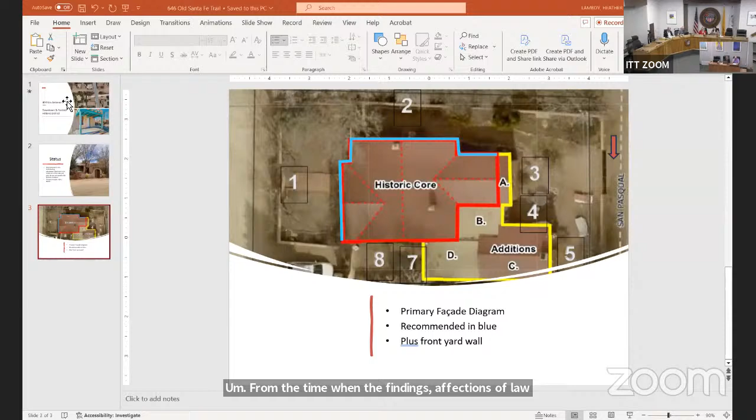Okay, we'll move on to the first case. Heather, this is your case. Are your applicants in the room? Yes, they are. IT, if you can go ahead and put the PowerPoint up, I appreciate that. I'm sorry if this PowerPoint is very basic, but I ran into some time constraints.

The application is for a status review for the structure, a single-family residence located at 403 San Antonio Street, which is located in the downtown and east side historic district. It's on the southeast corner of San Antonio Street and Acequia Madre, directly across from Acequia Madre School.

The consultant who produced the recommended status recommended non-contributing. There's a lot of information as to why that non-contributing status was a recommendation. Staff reviewed the application. It is possible that a contributing status is warranted in this case because the additions are to the rear and to the side of the historic building. The historic building's vocabulary is present and discernible.

So staff is making the recommendation of a contributing status with primary facades number 1 and 2, highlighted in blue here, which is the extent of the historic building, the north and west elevations of the historic building, plus the front yard wall, which is a distinguishing characteristic that was there historically as well.

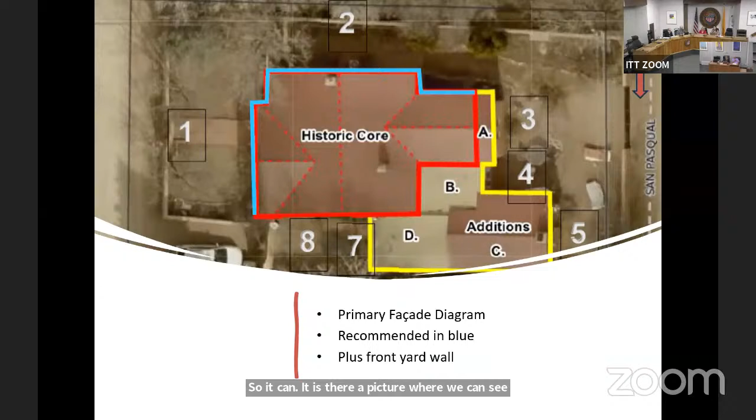And the wall, so is there a picture where we can see exactly what portion of the front wall you're referring to as being proposed to be contributing? One moment, let me get a picture of that for you really quick. I'm sorry for the delay. Okay.

Okay, and so you're recommending that the front wall that's aligned with the street is not being recommended as contributing? That is correct. Do we know anything about the history of that wall? That was not addressed in the HDRB.

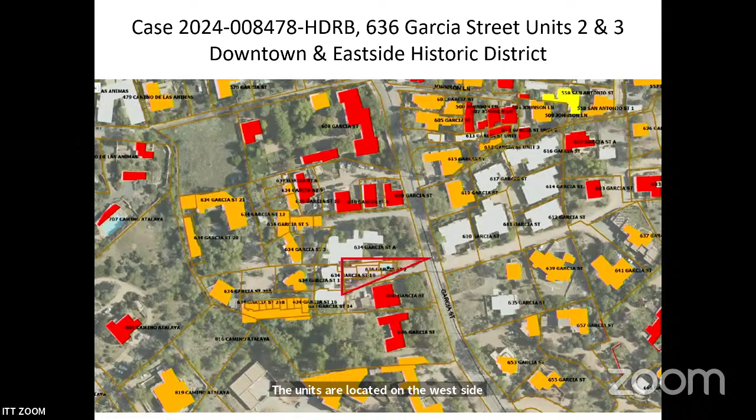Can you hear me? This is case 2024-8478 HDRB for 636 Garcia Street, units 2 and 3, for status review. 636 Garcia Street consists of 3 units, now condos with separate owners for each unit. The units are located on the west side of the road, south of Camino de las Animas and Johnson Lane. The multifamily residence at 636 Garcia Street is a 3-unit compound with no historic status assigned to it. The property is located in the downtown and east side historic district. The structure was constructed in the early 1950s by adding 2 dwellings, an apartment and a 1-bedroom rental, to an existing 1940s garage.

What was formerly the garage became Unit 3. In the 1950s, the 3 units were associated with the main residence to the south, which was split from the lot in 2021 and addressed as 640 Garcia Street.

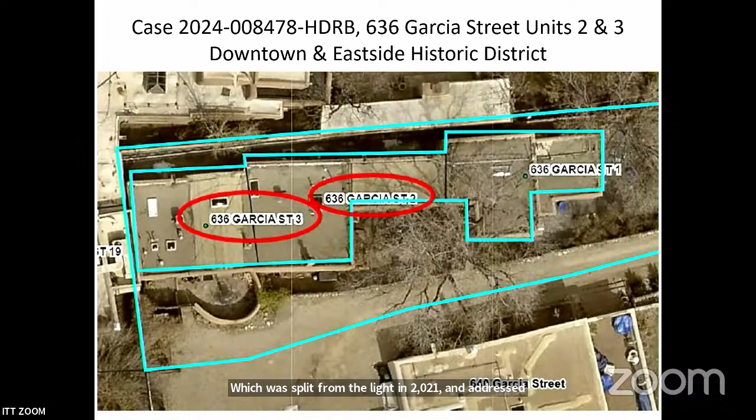Units 2 and 3 at 636 Garcia Street are constructed of adobe in a vernacular style with stucco walls, concrete foundation, and a single level. The roof consists of a combination of flat, gabled, and shed roofs. Windows throughout the structure are wood, with a combination of single hung, casement, combination picture, sliding, and fixed windows. Doors consist of single leaf wood and double doors with full light plank, half light, and divided glass.

Unit 2 is 1,032 square feet and shares a common wall with Unit 3 on the west and a common wall with Unit 1 on the east. The south elevation is the front of the structure and looks into small courtyards, consisting of an entry door and windows in the bedroom, kitchen, and living room. Some of the windows have been replaced at an unknown date, and it is unclear if the openings are original to the structure.

The north elevation includes newer windows, several non-historic openings, including a long combination picture window on the more eastern portion of the unit in the living room, single light casements in the bathroom, and a divided light casement at the bedroom further to the west.

Unit 3 is 754 square feet, shares a common wall with Unit 2 on the east and the neighboring property to the west. The south elevation looks into a small brick courtyard. The east end is most likely part of the original small house and has a full light door in the living room, flanked by modern casement windows. To the west was likely the earlier garage and includes a half-light door and windows arranged in a stepped manner. The north has gabled and flat roof sections. The gabled area on the east has a pair of modern glass doors opening to the living room, while the flat roof portion on the west has a pair of wood sliding windows in the bedroom.

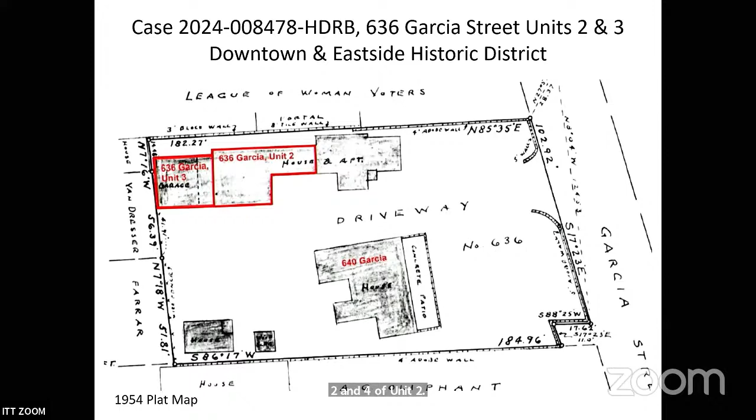Though the property is no longer associated with the primary structure at 640 Garcia Street, 636 Garcia Street Units 2 and 3 have historic integrity of their own. They are constructed of adobe and are representative of how historic buildings were expanded over time. Staff believes the south elevation, facade 2 of Unit 3, is the primary facade due to the historic width of the door and the layout of the fenestrations and the various roof lines. The south side, facades 2 and 4 of Unit 2, are the primary facades due to the inset of the fenestrations and the various roof line of the structure.

Staff recommends the historic status of the structure be designated as contributing, and the south facade, facade 2 of Unit 3, and the south facades, facades 2 and 4 of Unit 2, be designated as the primary facades for SFCC section 14-5.2C designation of significant and contributing structures.

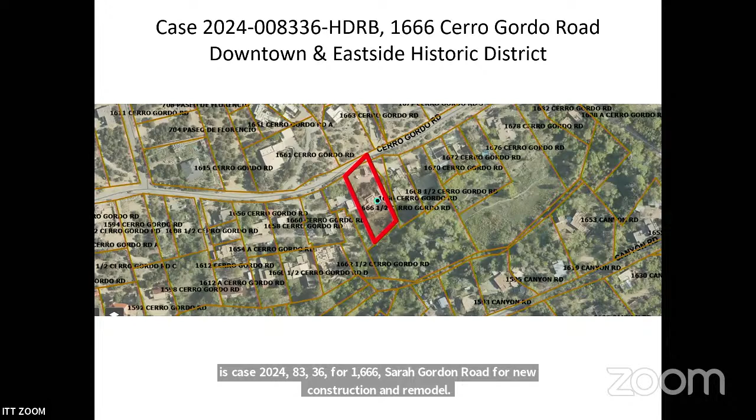This is case 2024-8336 for 1666 Cerro Gordo Road for new construction and remodel. 1666 Cerro Gordo is located on the south side of Cerro Gordo, just east of Paseo de Florencio.

The property at 1666 Cerro Gordo is located at the top of Cerro Gordo Road at the head of a private driveway. It and all the other homes on the dirt lane sit below grade on a terraced bench dating from the area's agricultural use. The Acequia Cerro Gordo, which allowed this agriculture, courses along the backside of this house.

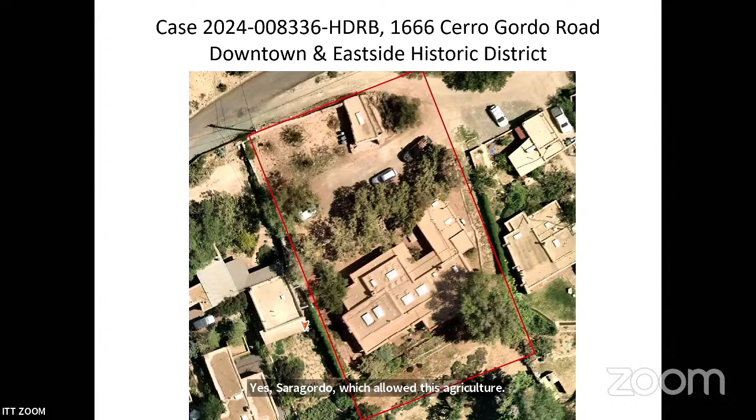A tall stone retaining wall holds back the earth underneath Cerro Gordo, and abutting against the wall is a small stone building, which was once a garage. South of this is a screen of junipers, with the land stepping down to another terrace where the house is located. The 420 square foot stone garage unit is listed as significant to the historic district. The stone garage was constructed prior to 1948 with inset vigas, a large buttress on the southeast, and a smaller buttress on the southwest. The door in the garage was replaced after the 1983 survey.

The single-family residence with garage at 1666 is 3,345 square feet. It's listed as non-contributing to the downtown and east side historic district.

The main residence has had numerous additions and reached its current compound footprint by the late 1960s. After 1978, portals were added across the north facade and a sunroom was constructed on the east elevation. The house went through a major renovation in 2000, during which the windows were refurbished and replaced. The carport was reconstructed and new doors were added.

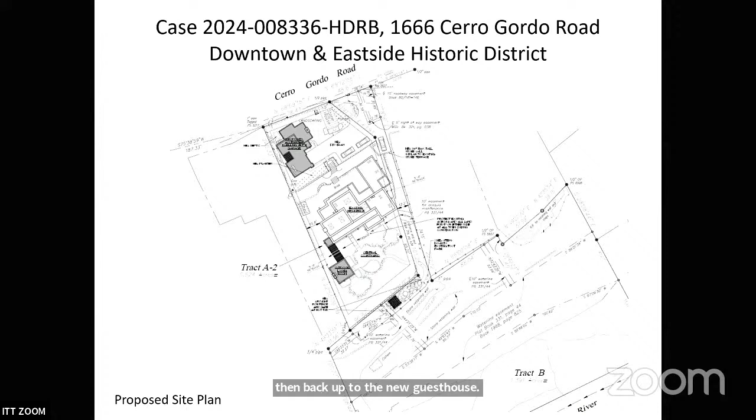On the significant stone building, the applicant proposes to replace as needed the glazing, flashing, and weatherproof the existing skylight, while retaining the skylight opening and height. Install a mini split condenser to the west of the structure along the retaining wall, with line sets penetrating the existing small opening in the building wall. The condenser unit and lines will not be publicly visible.

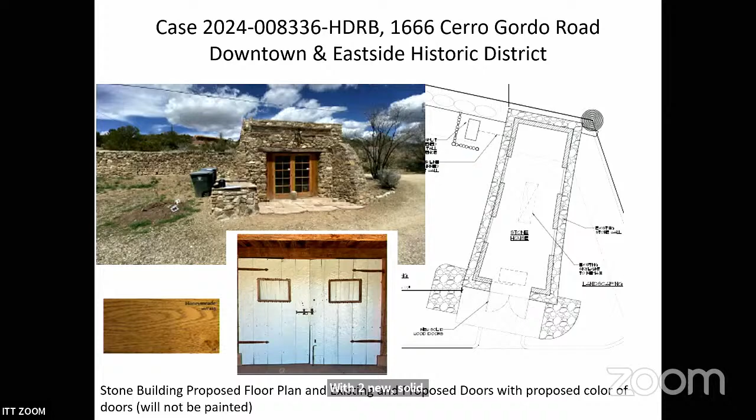They will also replace the French doors on the south elevation of the stone building with two new solid wood zaguan style doors. The doors will be stained in a honey mead color. And those are the only proposed changes to that stone building.

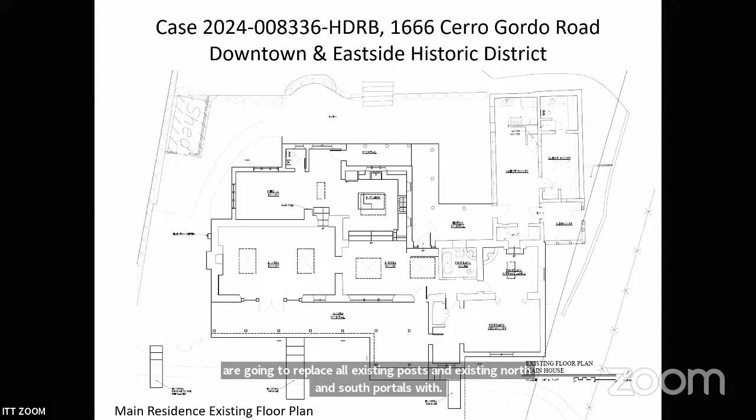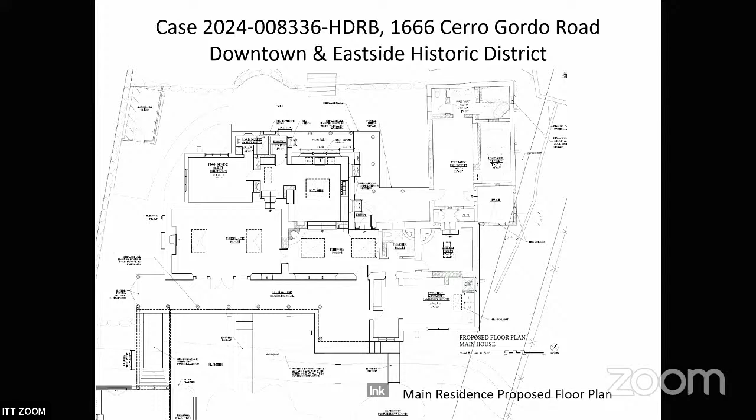On the main residence, they are going to replace all existing posts and existing north and south portals with new 10-inch diameter posts, paint all posts and beams in a coastal plain, paint the door and window trims and shutters throughout, and restucco the existing house with cementitious in adobe color.

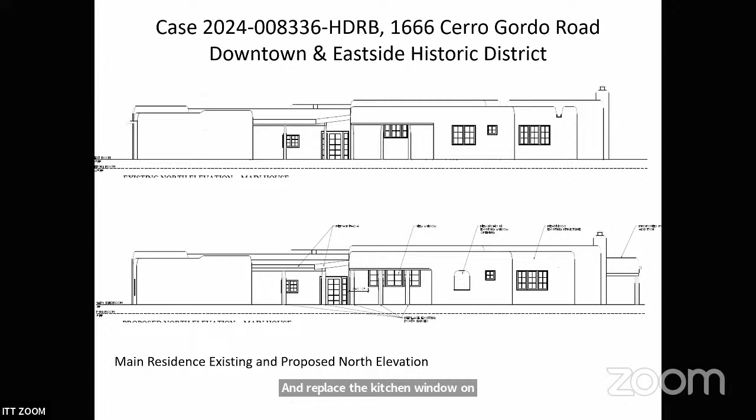On the north elevation, they're going to remove the existing window on the north in what will be the new pantry location and infill it to create an exterior nicho, and replace the kitchen window on the north elevation with a 10 by 3.5 inch divided light window.

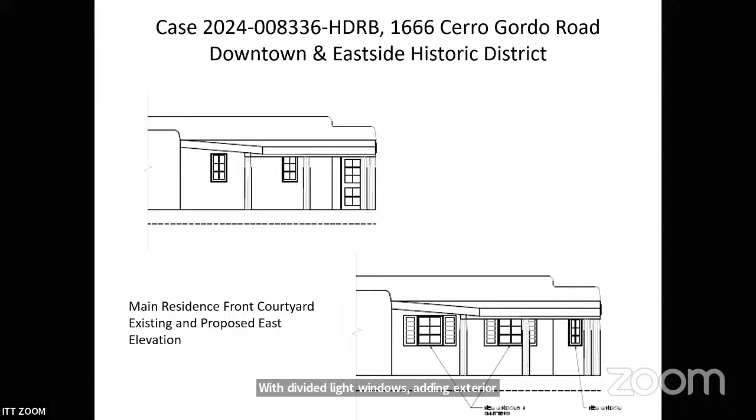On the east elevation, they're going to remove the exterior door at the kitchen under the portal and replace it with a divided light window. Replace both windows adjacent to the stove looking out into the courtyard with divided light windows, adding exterior shutters to these two new windows. The size of those windows is changing.

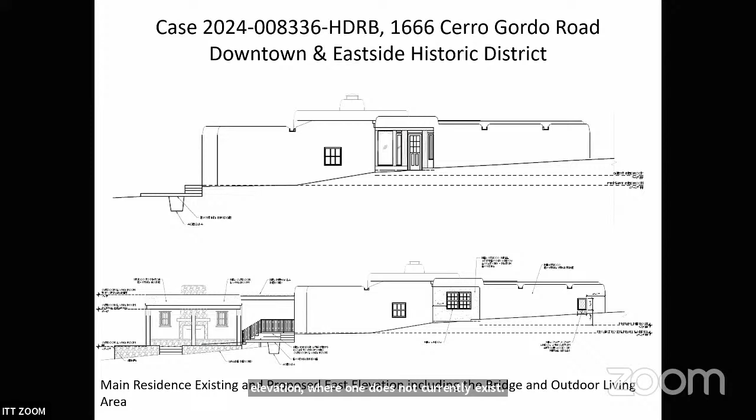Install a window in the new primary bath on the east elevation where one does not currently exist, and replace the windows and door in the sunroom and infill the remaining area.

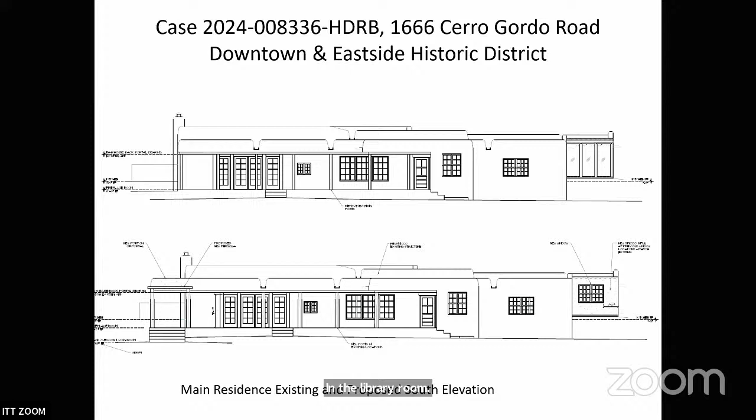On the south elevation, they're going to extend the south portal by 100 square feet and install 2 new posts, install a skylight in the library room, and replace the windows in the sunroom on the south elevation and infill the remaining space.

This is the west elevation of the main residence and includes the proposed bridge and open living area, which are coming up next.

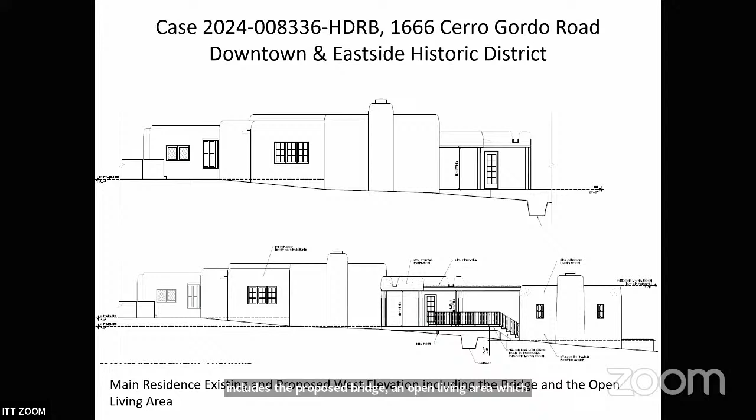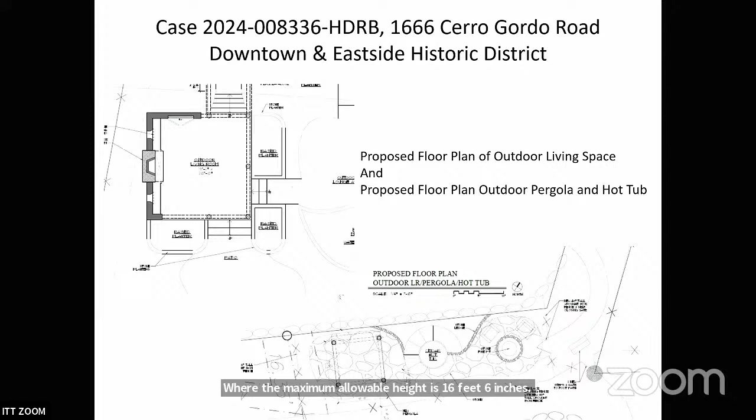This is our accessory structure. They're going to construct a 383 square foot outdoor living room with a stone fireplace and chimney to a height of 11 feet 7 inches, where the maximum allowable height is 16 feet 6 inches. There will be stuccoing in cementitious adobe, and all posts and beams will be painted in coastal plain.

They're going to construct a bridge over the acequia. The bridge will have a wrought iron railing and a wood pergola above it. The pergola will be stained in honey mead. The posts will be 10-inch in diameter. The bearing beams will be 8-inch by 10-inch. The roofing will consist of latillas that vary in size with a 4.5-inch maximum diameter.

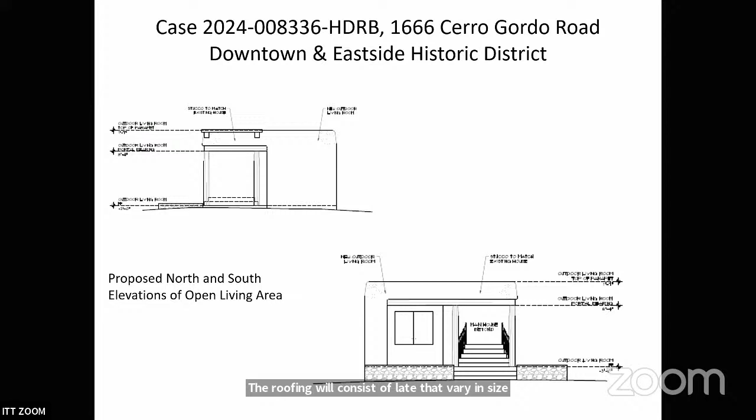Site changes will include constructing 48-inch tall coyote fence screening southeast of the driveway, installing 2 condenser units with 48-inch tall coyote fence screens, constructing 36-inch tall stone wall at the new guest parking space on the east side of the property.

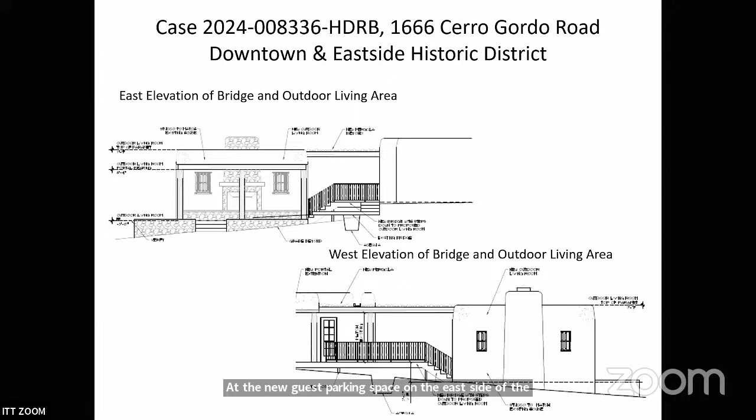This is going to be similar to the existing stone terrace across from the main house. They're going to construct a 95 square foot wood pergola located on the south of the property. The pergola will be stained in honey mead. The posts will be 10 inches in diameter to match the rest of the house. The bearing beams will be 8-inch by 8-inch, and the roofing will consist of latillas that vary in size with a maximum 4.5-inch maximum diameter.

Install a hot tub, replace the fence at the hot tub location with a 48-inch tall wrought iron fence with a self-closing gate.

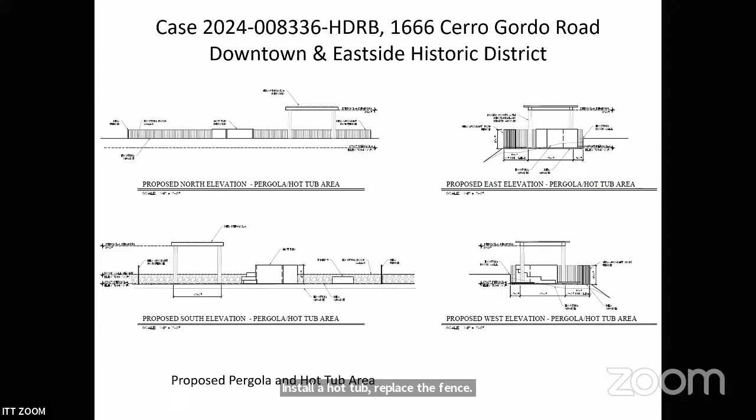And then we go to the guest house. The guest house will have a garage. The applicant proposes to construct a 1,500 square foot guest house with garage to a height of 12 feet, where the maximum allowable height is 16 feet 6 inches on the north of the property. This will be right next to the stone building.

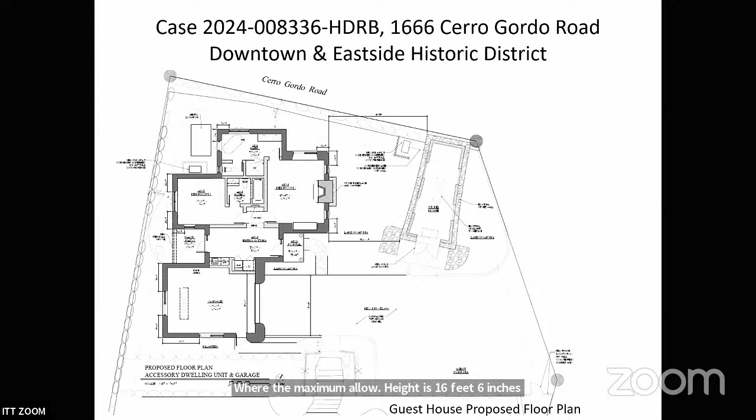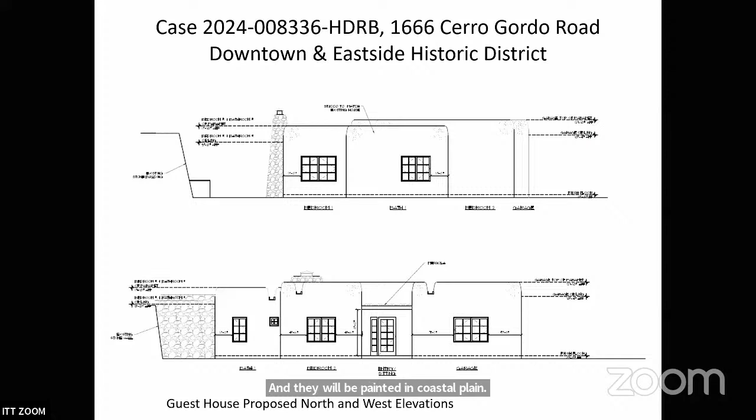Posts and beams in the portals on the east elevation will be stained in honey mead with decorative painted traditional motifs; the design is still to be determined, and they will be painted in coastal plain. A stone fireplace and chimney will be located on the east elevation. The pergola on the west elevation will be constructed with 8x8 wood beams. The door and window trims will be painted in coastal plain, and the stucco will be cementitious adobe.

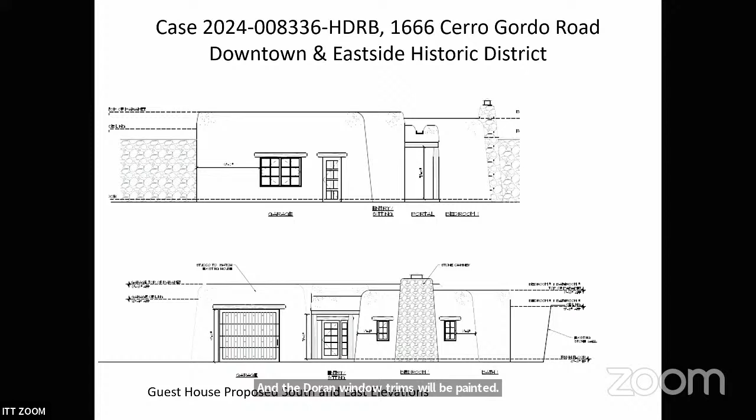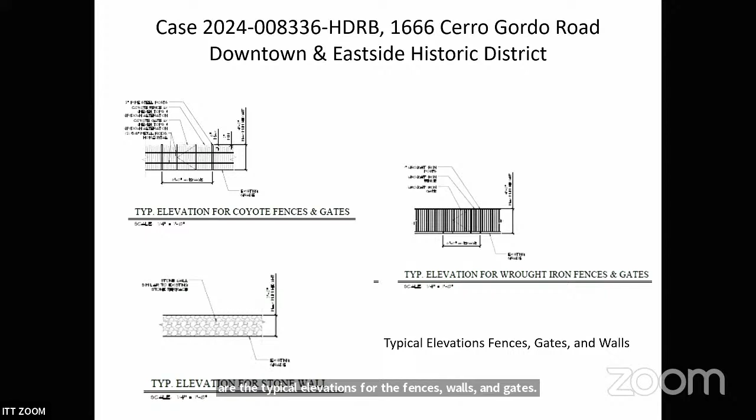Staff recommends approval of the proposed project and finds that the application complies with sections 14-5.2D, general design standards for all historic districts, and 14-5.2E, downtown and Eastside design standards.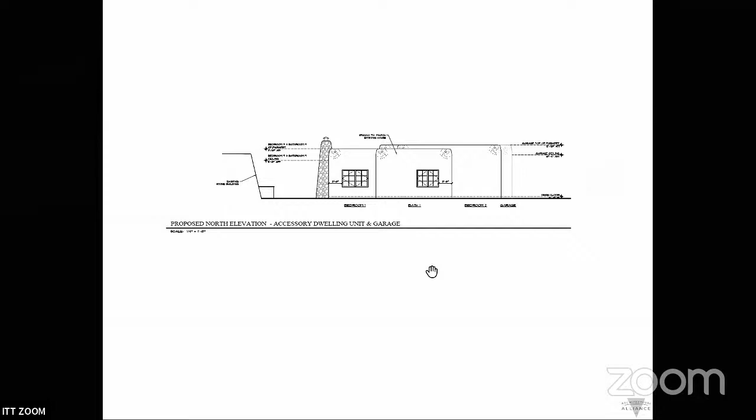So Lanny gave us a pretty thorough presentation on the project, which has a lot of moving parts. What else do you have to tell us? Thank you, Chair Guida. Good evening, board members, and thank you, Lanny. My presentation is going to be quite short. I'll go through it as quickly as possible so we can have time for other people and for comments.

The owners of this property need additional guest rooms for their grown children to come and visit them. Looking at the existing main house, you can see it's bound on the south side by the acequia and on the north side by the retaining walls. So there's no room to add on to the existing main residence. That is why they're proposing the casita with an attached one-car garage on the northwest side of the property.

They also would like to have a little more outdoor entertaining space. The existing portal is quite lovely, but it's not quite big enough for a dining room table for a family. So they want to do an outdoor room, and we are proposing that outdoor room be in this lovely courtyard just to the south of the main building. We would like to connect that via a bridge and a pergola so it feels like a continuous structure and they really engage each other.

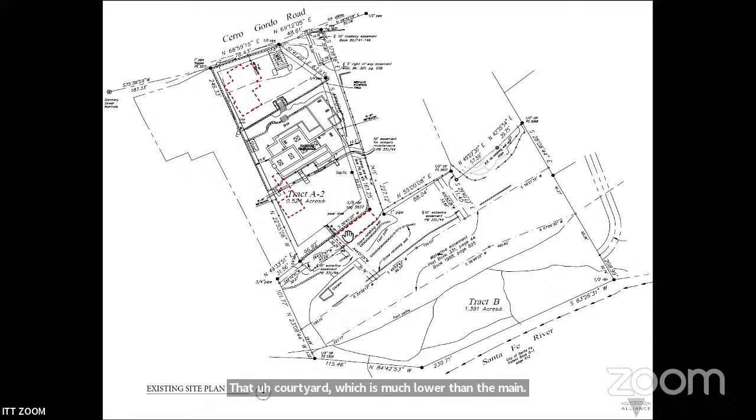It'll also give an opportunity for the main house to start engaging that courtyard, which is much lower than the main house. Lastly, they would like to put a small hot tub and a small pergola on a lower terrace. I do want to note that we are creating a new parking space here. It's kind of an existing parking area, but it's quite steep, so we want to build a small retaining wall and pull the grade up. The retaining wall would be similar to the existing, really beautiful historic retaining walls.

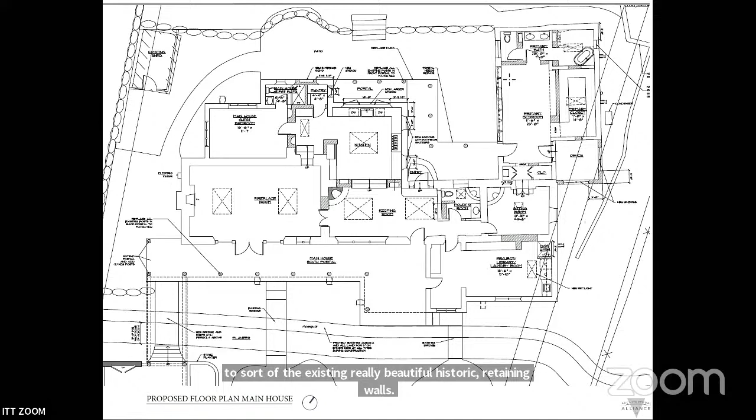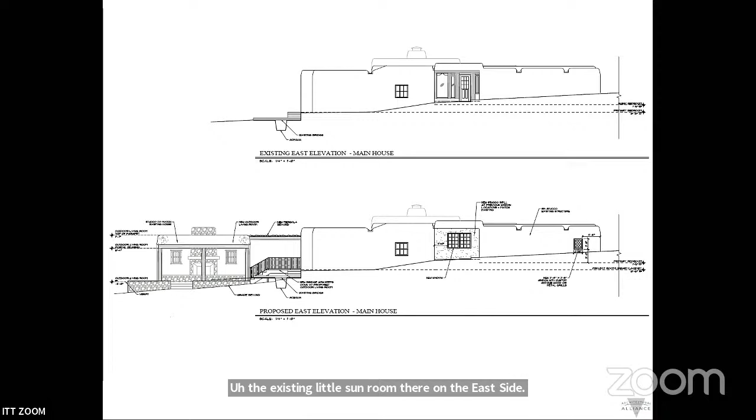As Lanny said, in the main residence we have just a few exterior modifications, replacing some of the columns, and we're going to have a wonderful nicho, which will give us a great design opportunity. The existing little sunroom on the east side is really, really hot because it's just all glass right now, so we want to reduce the amount of glass. We want to put in new windows that tie in with the existing windows in the main house and make that into a nice office space.

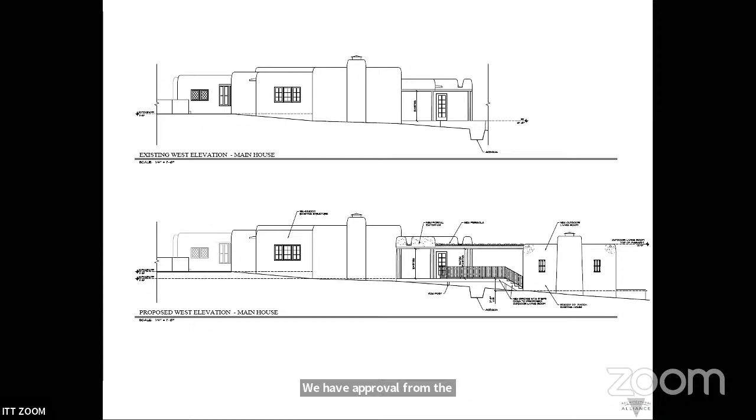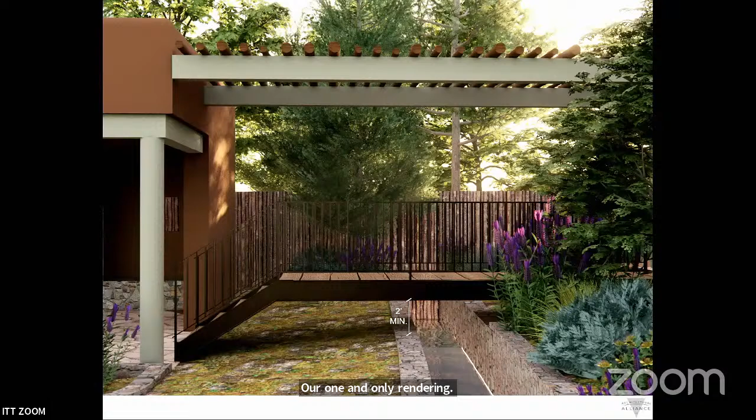In the outdoor room, we have this bridge and pergola connecting the outdoor room to a new portal addition. I want to note that we have approval from the Cerro Gordo Acequia Association for this design. We've presented it to them, and I'll show you our one rendering: the structure of the bridge, the supports, will be at least 5 feet away from the acequia on either side. The height of the bottom of the bridge will be at least 2 feet above the existing acequia.

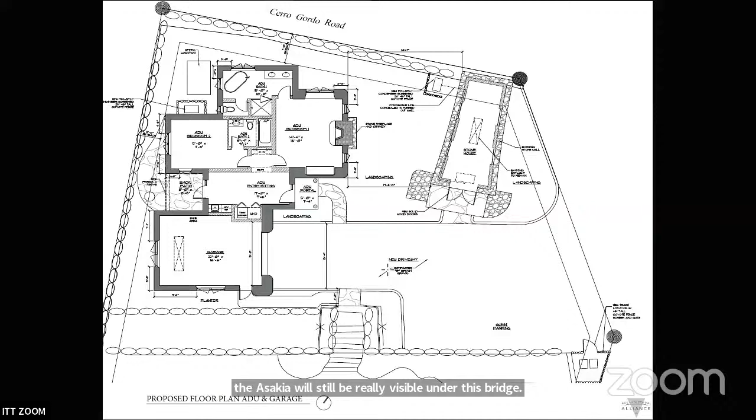As for the casita, I want to note a few items about the design. We have this fabulous historic stone building and the adobe existing main house. For the casita, we've taken hints from both structures, with some battering of walls and a little stone on the casita, but the casita will also be its own entity. It's the one building that will have beams that are carved and painted, and the owners have a wonderful design aesthetic that allows for color and life. I think the casita is going to be a really special structure.

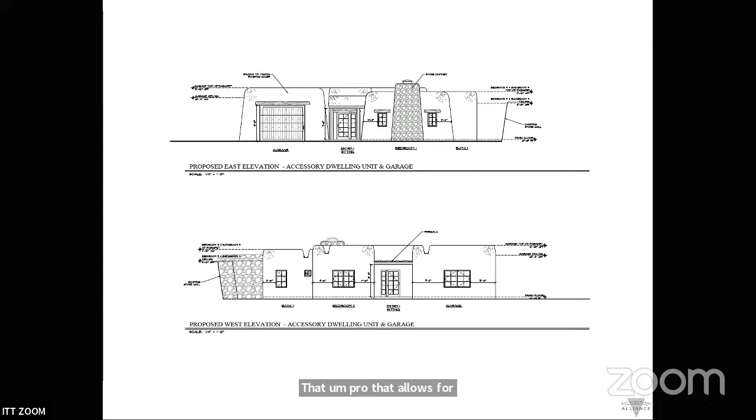And with that, I stand for questions.

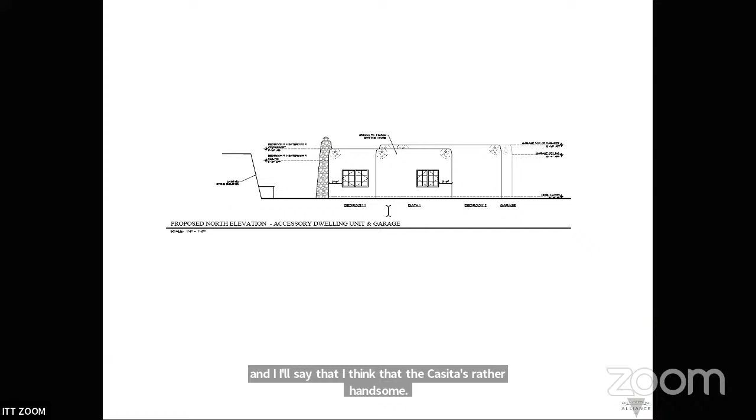Thank you, Hunter. Just a couple questions, and I'll say that I think the casita is rather handsome and would be a nice addition to the streetscape. I think even the outdoor room is quite nice as well. It certainly complements the architecture of the existing house.

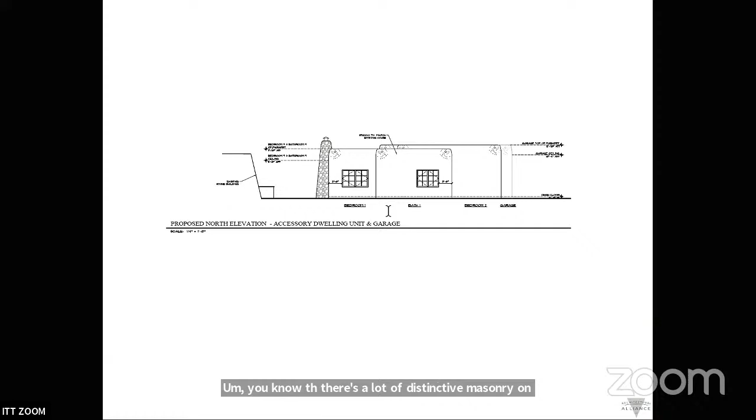The first question is about the stone masonry. There's a lot of distinctive rubble stone masonry on this property right now, and I'm curious: are you recreating that same type of full masonry construction, or are we expecting a veneer? What's the product being used?

We had a long meeting with the contractor and the owner on site. I do not want to do a veneer, and he doesn't either. He's passionate about the detailing of this project and intends to use full stone that will tie in with the stone there. If you look at the existing significant stone structure, you'll see it's actually not one type of stone—it changes as it grows. We're not going to match that exactly, but it will definitely be in the flavor and character of the stone on the property, since there are so many beautiful stone walls, but they're all slightly different.

I'd also like to note quickly about the visibility of the guest house. It's actually visible if you stand on the side—I drove by there this afternoon to make sure. Standing on the side of Cerro Gordo, you're really looking down on the roof, and you'll see a little bit of the north facade and a little bit of the east facade as you look down, but that's the extent of the visibility. There will be absolutely no public visibility of the outdoor room or the pergola where the hot tub is.

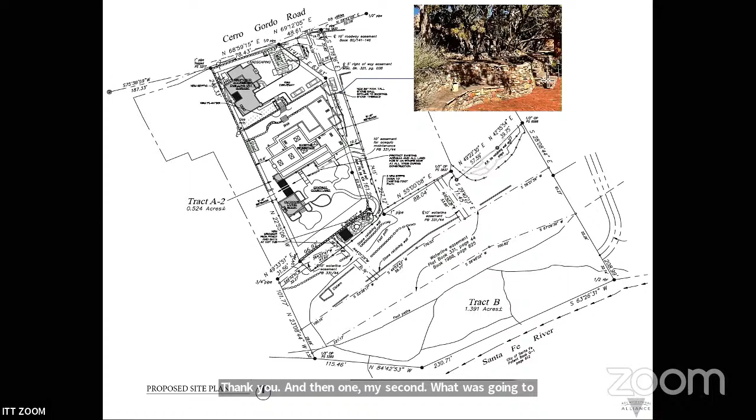I'm assuming the material of the stringer and the edge of the decking is steel. Yeah, right now we're showing it as steel because we would like for the depth of that to be as minimal as possible. Rather than going with wood, it would have to be much more bulky. I'd like it to be 6 inches if possible, which it probably could be. So it'd be steel and then wood treads.

Good. I think it's handsome, and I think in treating it so minimally, it makes it clear that the stair, the railing, and the deck of the bridge is kind of not architecture, right? It's kind of a garden structure in between. I'm wondering about the white painted beams above, and maybe if there's an opportunity to do something similar, either in color or material, that might downplay that connector to being kind of not architecture, still being there, but receding the way the bottom piece does. You'd be open to that?

Interesting. Yeah, right now the beams are wood and they're painted the same. It actually looks much whiter here than it will in person. We could pull up the samples again. It's more of a sagey green, like a light sagey green. The color palette was drawn from when I was on Canyon Road today, we counted 11 different projects. It's that similar kind of sagey green with the Adobe color.

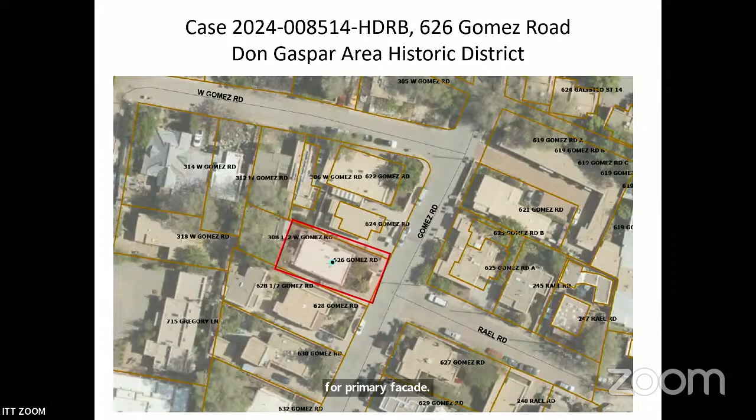626 Gomez is located at the intersection of Gomez Road and Rael Road. The single-family Pueblo Revival style residence at 626 Gomez is listed as contributing to the Don Gaspar Area Historic District, though primary facades have not yet been designated.

Two historical surveys exist for the property, one completed in 1982 and another in 1995. Both list the property as contributing to the district. The original construction date is listed as 1935 in the 1982 historic survey and as by 1942 in the 1995 historic survey.

Evident in the historic survey plans, an addition was constructed on the west elevation between 1982 and 1995. The historic survey states that the addition at the rear has little effect on the historic character of the original building, since it is not noticeable from the street and is clearly different from the original portion of the structure.

In 1998, the 2-foot yard wall was removed and replaced with a stucco finished block yard wall with a height that varies from 6 feet to 7.5 feet high. Additionally, in 1998, a glass block window replaced another window, but the opening and dimensions of the opening remain the same.

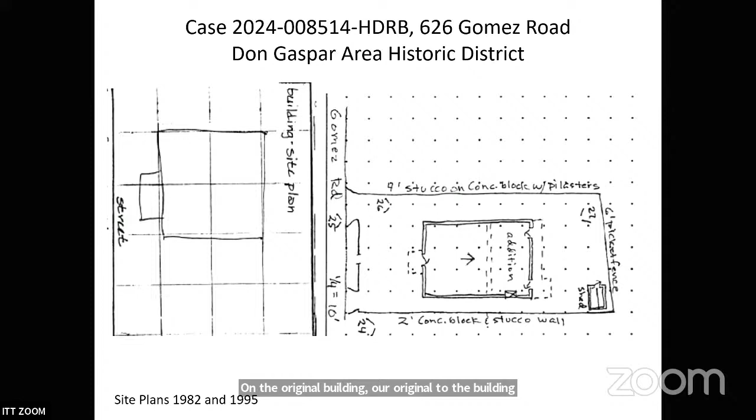In addition to the residence, there is a shed located on the property. The shed is mentioned in the 1982 historic inventory and may well be eligible for status, though the exact date of installation is unknown. The shed is a simple pitched roof frame structure with wood shingles and stucco. The door is wood with a single diamond-shaped light.

The homeowners applied for a downgrade to the status of the residence in 2022, but the case was never heard. No other cases were located in the Historic Preservation Office files. Today, the applicant requests status confirmation and primary facade designation of the residential building, yard wall, and status designation of the rear shed structure.

Staff recommends the historic status of the structure be maintained as contributing, with the original east or facade 2 elevation as the primary facade. The yard wall be designated non-contributing, and the historic status of the shed be designated as non-contributing per SFCC section 14-5.2C designation of significant and contributing structures.